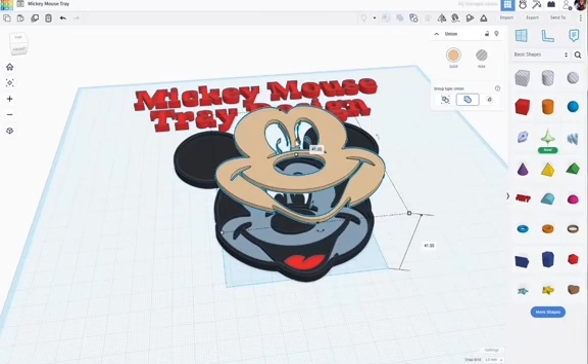Yesterday I posted a tutorial, an unnarrated one that wasn't step-by-step, and a number of people asked for more details on how to do this. We're going to end up making a tray here where all of the colors are separate objects, so that something like this can be exported as an OBJ and brought directly into Prusa Slicer or Bambu Studio and printed on a multicolor printer.

So let's get started. Let's grab all of this, slide it up out of the way, and start by bringing in my SVG that I got from Google. I've shown everyone before how I find images on Google and convert them using the convertio.co website. So here's the SVG I have.

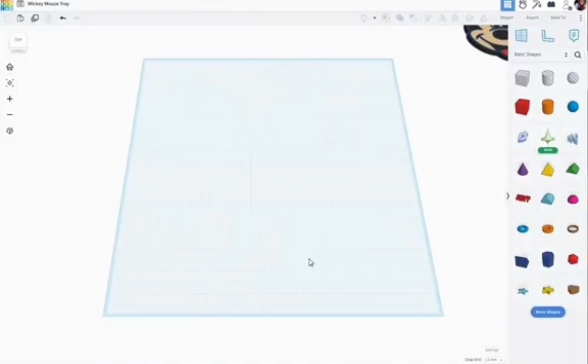This one says the dimensions are too big, so I'm going to click on Art and reduce the size down to 180 millimeters in width. Click on Import, and we'll give this a minute to bring it in.

I'm going to click on it and change the color to black. This is going to be our outline. I'm also going to reduce the height of this to just 2 millimeters, which will be the bottom height of our tray here.

Now that we have that, we're going to work with this and fill in the colors for the tongue, the eyes, and the face. Let's start with the tongue part of it here.

First I'm going to change my snap grid to off. Let's grab this SVG and lift it up off the work plane a little bit - you'll see why in a moment. This will make things easier to see when I make duplicates of this.

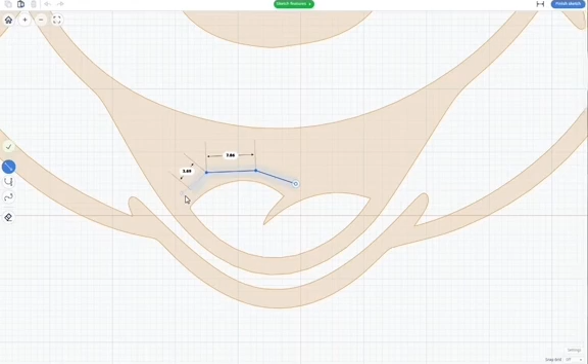I'm going to grab my sketch tool and drop that on the work plane. Now let's start with the tongue. I'll leave this as a straight line and just go quickly around the outside of the tongue - this doesn't need to be exact. We'll go around and meet back together here, then click Finish Sketch.

I'm going to change that to red, and change the height of it to just 2 millimeters.

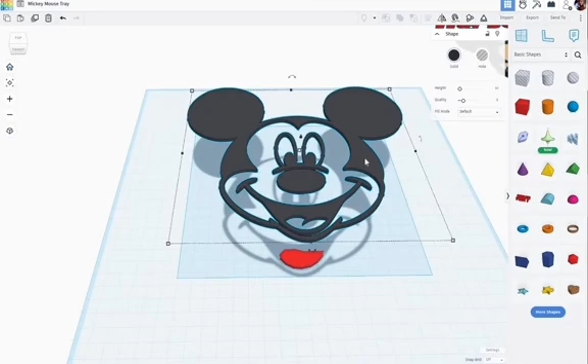Now here's the trick: I'm going to select this outline, duplicate it with Control D, change that to a hole shape, and drop it to the work plane. I'll use that to trim off that tongue. So I lasso select the two of those, Control G to group them together, and there's our tongue part. Let's do the same thing for the eyes.

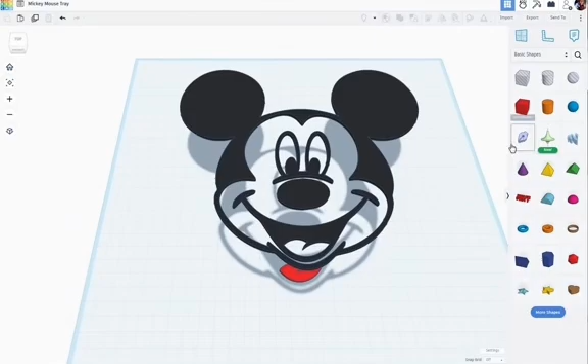Let's grab our sketch tool again and drop this anywhere on the work plane. Let's zoom out, then zoom back in here, and I'm going to go around the eyes - I need to do two of these. We'll close this one off.

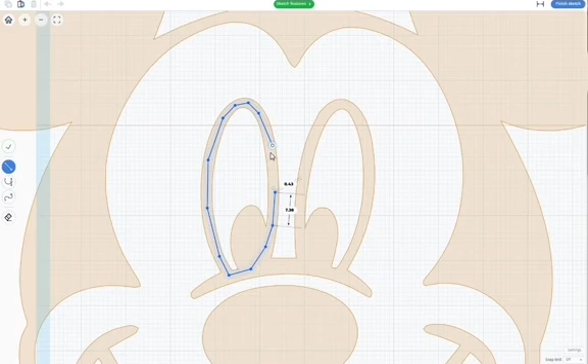I'm going to click on the pen tool again and go around the other eye. Again, this doesn't need to be exact - we just want it larger than the eye shape itself. Click on Finish Sketch, and while that's selected, I'm going to change that to white.

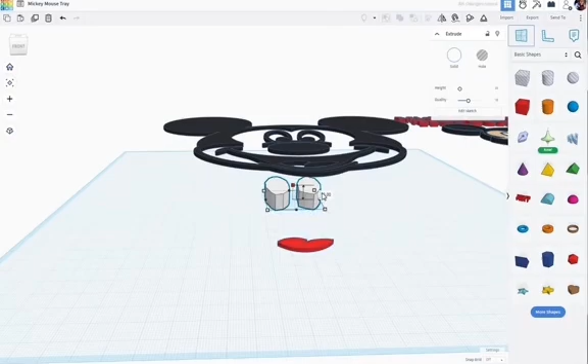Zoom in here, I'm going to change that to 2 millimeters. Again, I'm going to grab a copy of this outline, Control D to duplicate, change that to a hole, D to drop it to the work plane, and then I'm going to come in there and lasso select the eyes and that outline.

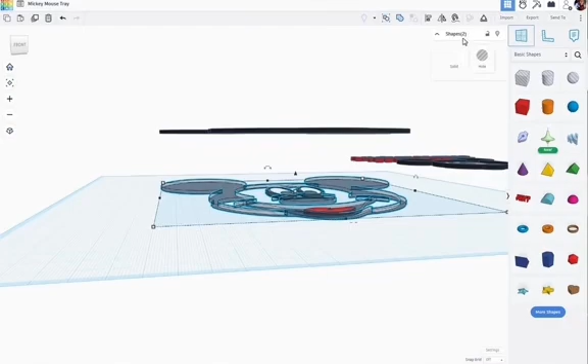I have 2 shapes here, Control G to group those together. Now you see we have those. Now I'm going to go ahead and lift these eyes up, and lift the mouth up off the work plane here. You'll see why in a moment.

Now let's do the face part. Again, I'm going to grab the sketch tool, drop that on the work plane, zoom out. I'm going to outline the face.

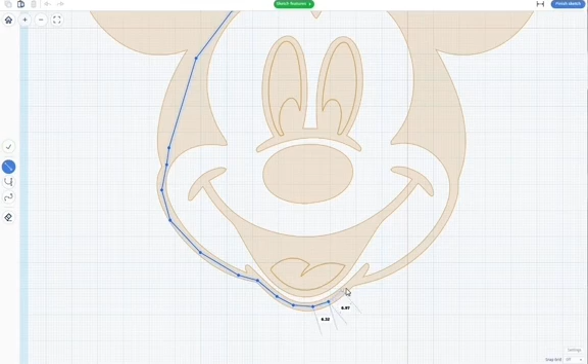Move this up, keep going around. Careful that I don't want to go outside of the outline here. Come down here, come around, close that off, click Finish Sketch.

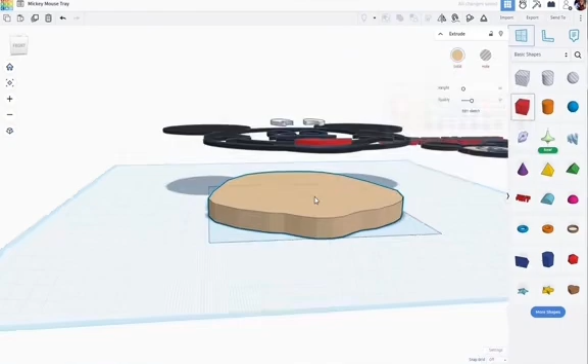Let's change that to sort of a tan color. And again, I'm going to change that to 2 millimeters. Okay, now here's the trick. We need to do 3 duplicates here.

We're going to grab the outline, Control D, change it to a hole, drop that to the work plane. I'm going to click on the tongue part here, Control D, change that to a hole, drop that to the work plane, and the eyes as well.

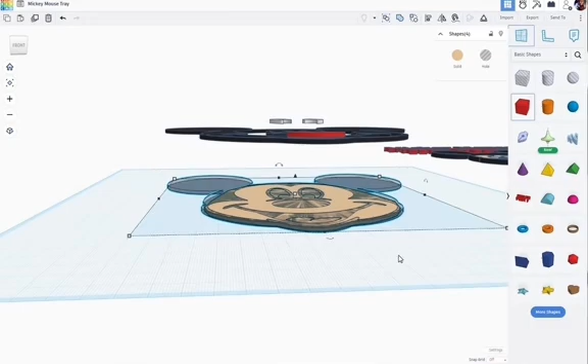I'm going to click on the eyes, Control D, change that to a hole, D to drop to the work plane. Now I'm going to lasso select those 4 items. So that's the tongue, the eyes, and the outline. And then we also have the tan for the face. I'm going to Control G, group those together. And there we have our face part.

So now I can go back, click the tongue, I'm going to drop it down, click the eyes, drop it down. I'm going to click the outline, drop it down. Now we need to do the outside part of this tray here.

Now if we click on this outline, you'll see that this is still an SVG that we originally brought in. We can use that to make our outside of the tray. So I'm going to click on Duplicate here. And then over here in the dialog, I'm working with that duplicate. I'm going to change this fill mode to inner line,

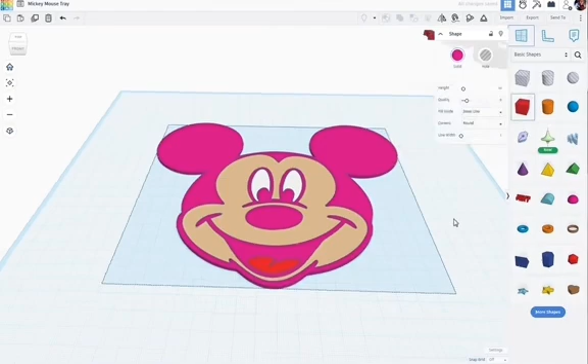corners round, and I'm going to change the line width to, let's try 1 millimeter here. And just so we can see it here, let's change that to a purple color. Give it a moment here to resolve. There we go. Let's change the height of this.

This will be the sides of our tray. So now you can see that a little bit better. We have the sides of the tray. Let's go ahead and change that to black, just like our outline.

And I'm going to select that outline and that outer or inner line part. Select those 2 items, and I'm going to Control G, group those together. Now, it's important that you don't group all of these items together. You want each color to be a separate object.

The eyes are a separate object. The face is a separate object. The tongue is a separate object. Each color needs to be a separate object.

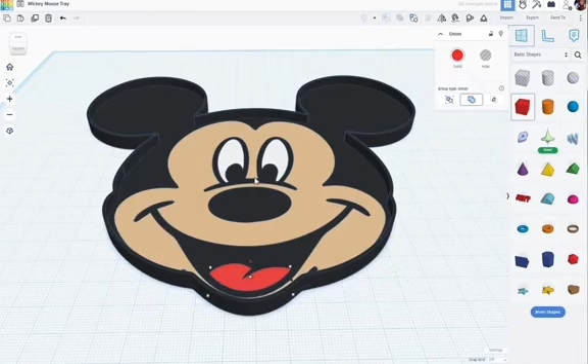Now, here's the trick. We're not going to group these together. We're not going to export it as an STL. We want to select all of those items, go to Export, and click on OBJ.

This is going to create us an output zip file, and in this zip file, you'll want to unzip that, and within that there will be an OBJ that you want to import into Bambu Slicer, and once it goes into Bambu Slicer, you can assign each one of those colors to one of the spools in your AMS.

So there you have it. Super quick, super simple way of making trays using imported SVGs and the sketch tool.